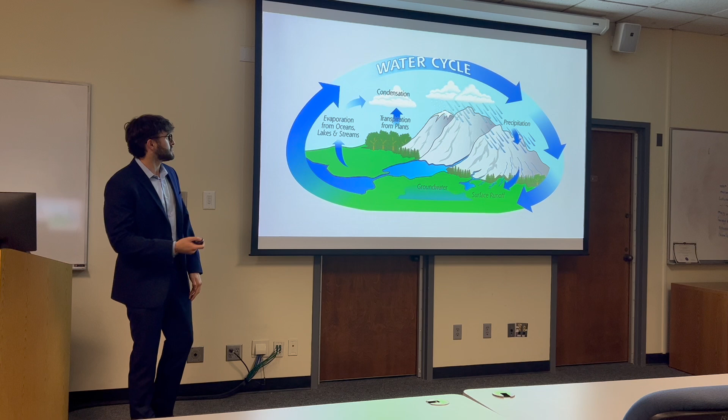This could come across as surface runoff, groundwater, and down the line, it becomes evaporated from oceans, lakes, and streams, or is even transpired from plants, turns into condensation in the clouds, and then repeats the process once again, either by snow, rain, hail, and it loops.

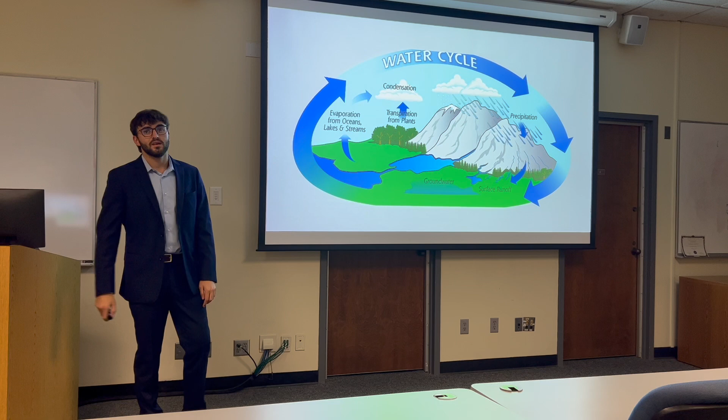What this image does not tell us, though, is what happens when water is artificially polluted and different sediments and chemicals and waste is introduced into this water.

And from this experience, this process, I learned, against my will, what the process is of taking dirty, contaminated water and making it clean. We started by breaking up the layers that began to compile in the first tank, and from this, water could be distributed to the second, where anaerobic bacteria would eat up and remove the sediments and the contamination. And eventually, with time, this water would be reintegrated into the environment and absorbed by the ground and reintroduced to that water cycle that we know so well.

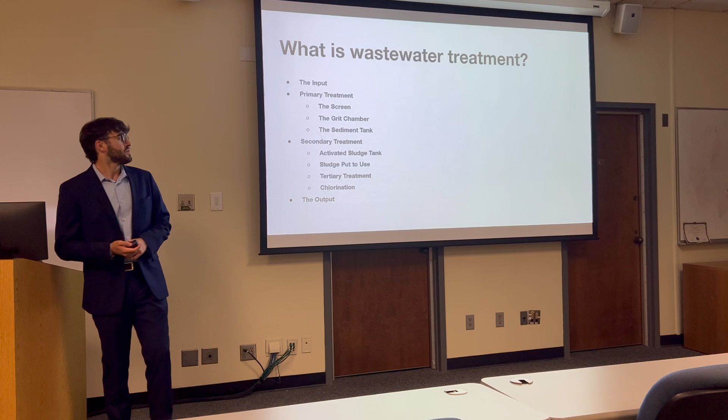First is the input. This can be done through sewage lines that are connected in urban areas, or even personal sewage tanks that are drained and brought to larger treatment facilities. This is a contaminated water that has excrements, urine, pardon my French. You may have toilet paper and just other items that are not suitable for reintegration to the environment, let alone consumption. And they begin the primary treatment phase.

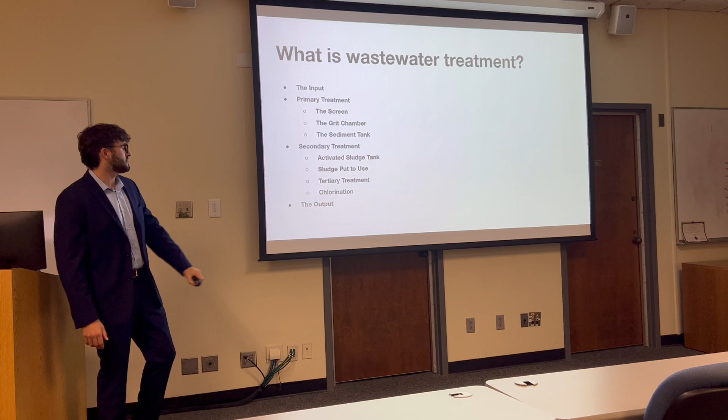This treatment phase includes screening, the grit chamber, the sediment tank. It moves on to the secondary treatment phase, which is a lot more technical and uses a lot of chemicals. And this is the activated sludge tanks, that sludge put to use, tertiary treatment, and then the chlorination phase. And finally is the output.

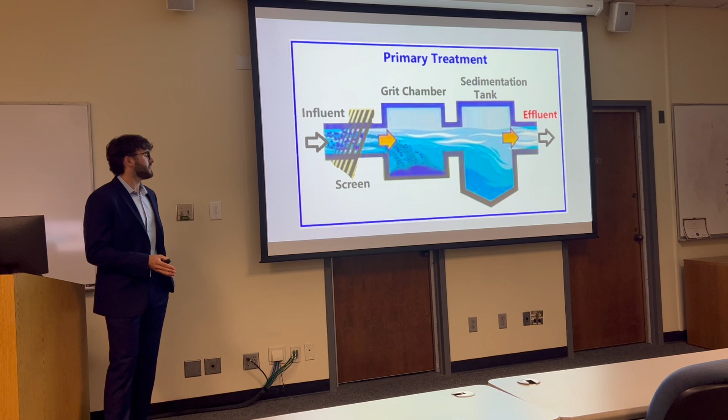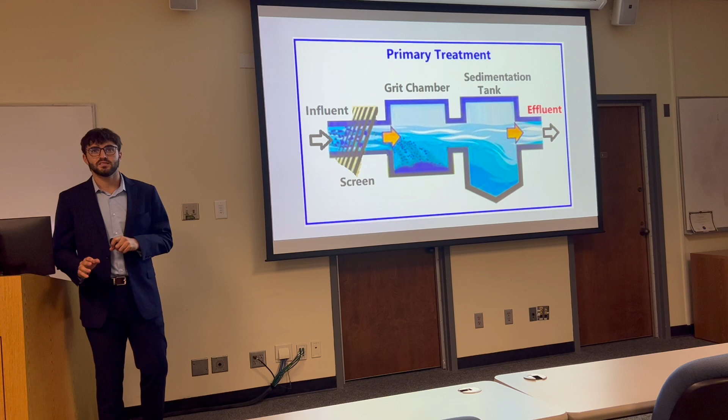This is a helpful diagram, also introduced by Chemtech US, that shows the primary treatment phase of wastewater treatment. First is the influent. This is the input. This is the highly contaminated water that is brought to treatment facilities. It goes through a general screening process, which gets out the big contaminants such as inorganic waste, and also bigger chunks of matter. Then it goes into the grit chamber, and this is where my grandpa comes in. I'll get to that soon.

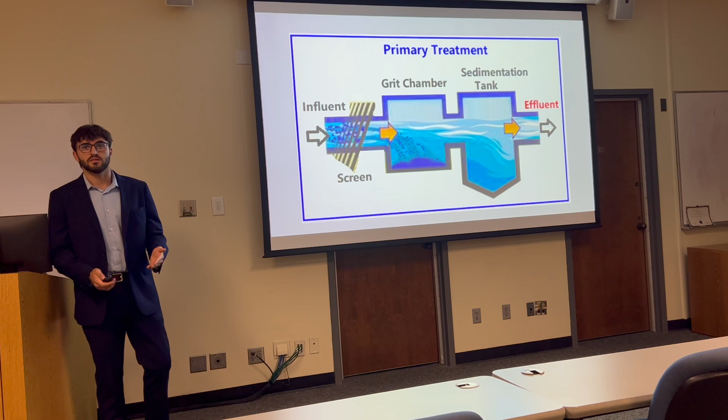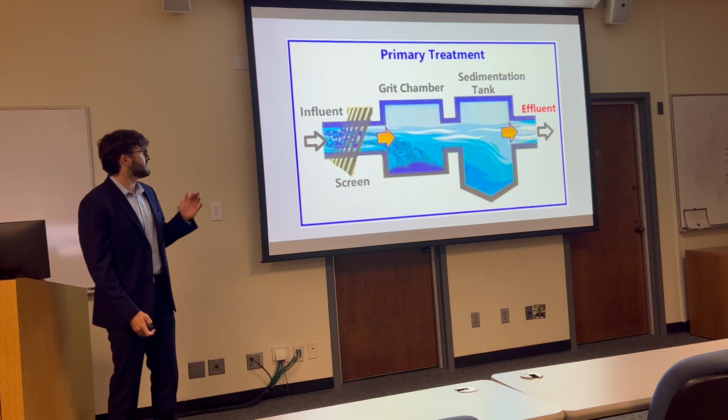But the grit chamber is where the heavier sediment settles at the bottom, and the less contaminated water, maybe it's either smaller particles or just more movable waste, is brought to the sedimentation tank, and then eventually goes to effluent. But this brings us to the secondary treatment phase.

You see the word sludge showing up a lot in this area. And sludge, simply put, is a condensation of waste that is present in contaminated water. Again, not to get into specifics, but I think you all can infer about what this means. This is the most complicated and technical phase.

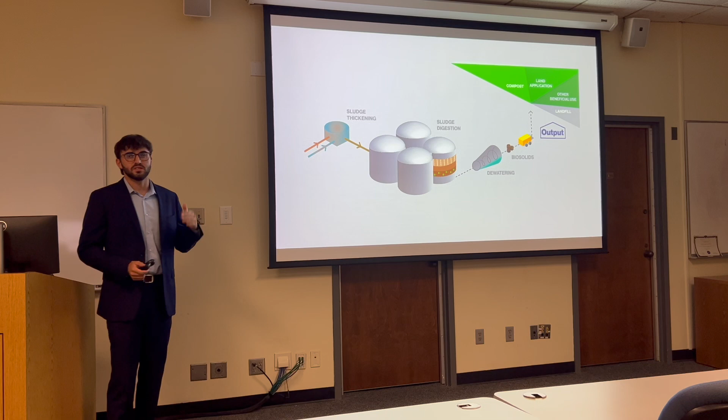This is when oxygen is introduced into the sludge and it activates the bacteria, which is the process in which chemicals are recycled and all the contaminants through different processes are removed. This is far more in depth than the screening or the sedimentation chamber. This is really changing the chemical makeup of the water. It separates out from an atomic level the clean water and the waste.

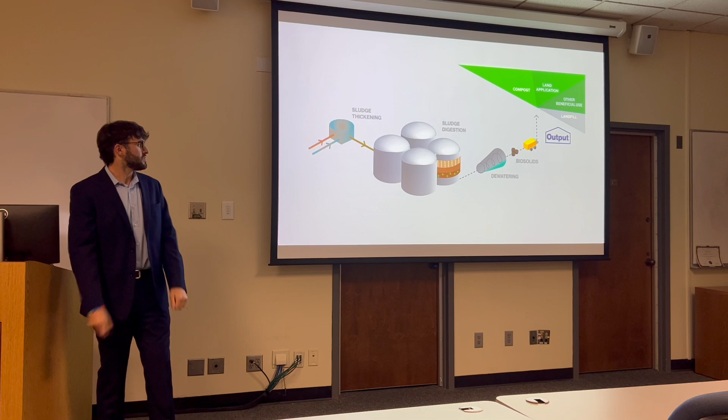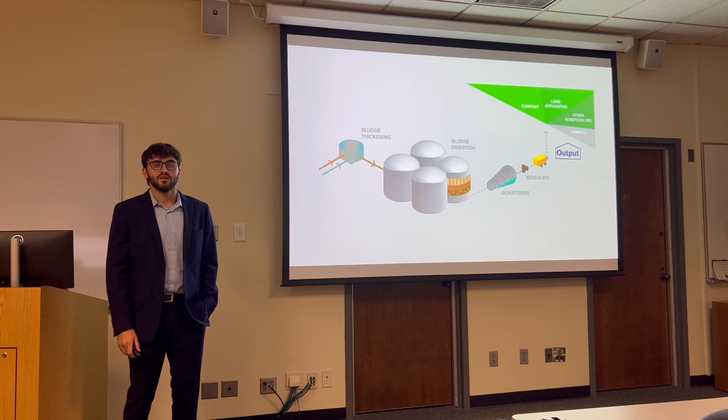This graph here focuses on the biosolid element, but here it shows the dewatering phase, where water is dehydrated from the biosolids, which are then used in compost, land applications, landfills. They're very natural fertilizers and can be extremely useful for renutrifying ground.

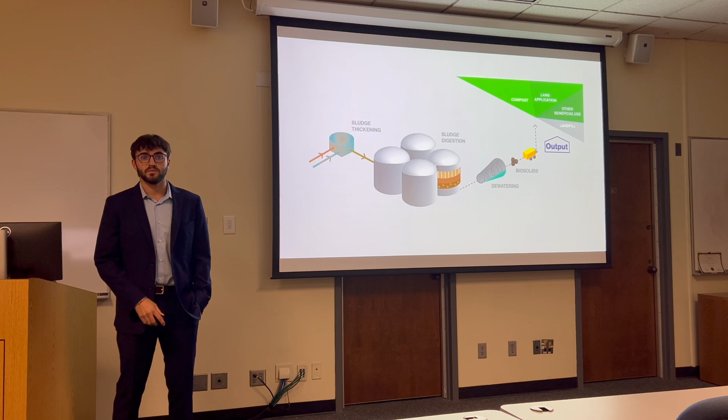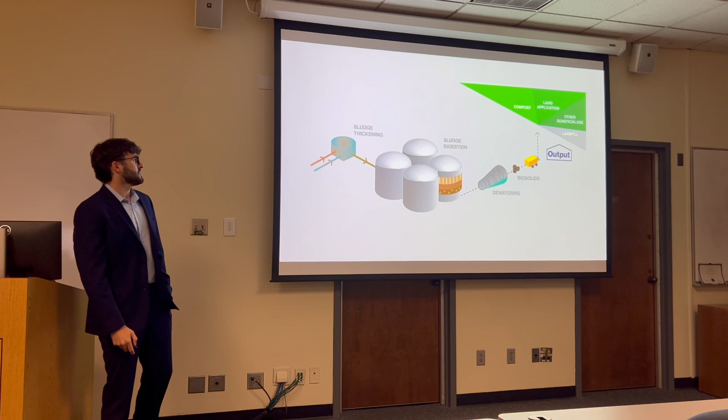And when the biosolids are dewatered, the water then in turn is able to be reintroduced to the environment or used for consumption once again, which sounds gross, but trust me, it is effective and clean as part of the process that these treatments do. And we are able to consume that once again, and it gets reintroduced into the water cycle. That is the final step of the process.

This begs the question, is all water treatment equal? What I showed you here is an idealistic process in which water is taken from a contaminated state, brought through a treatment facility, and reintegrated as clean water. The answer is that no, all water treatment is not equal. Around 20 or so institutions in 2022 got together to evaluate wastewater treatment sites' ability to detect and identify diseases present in the water.

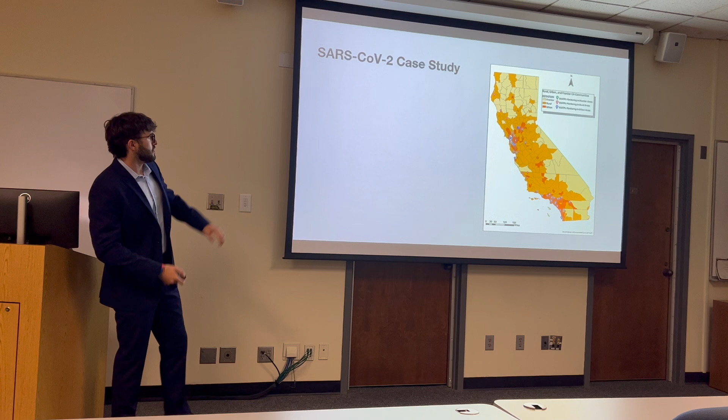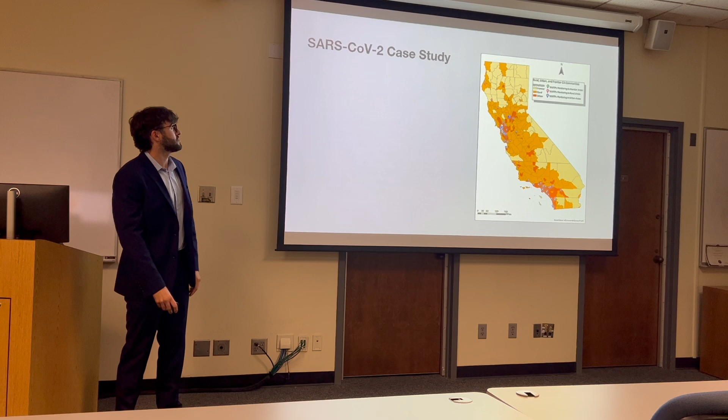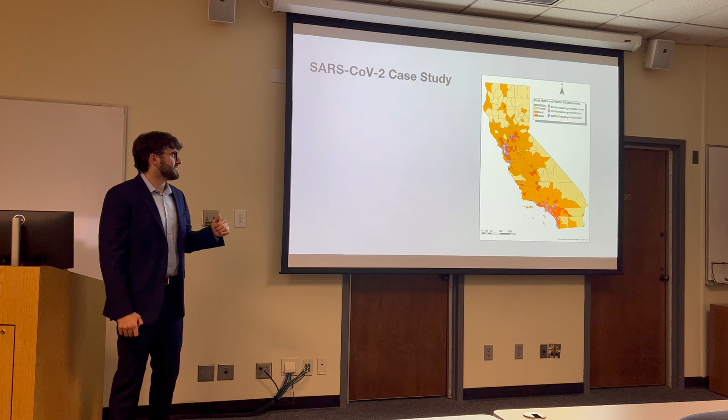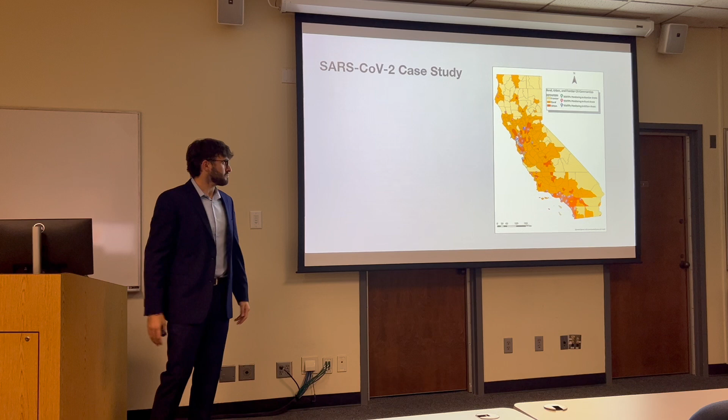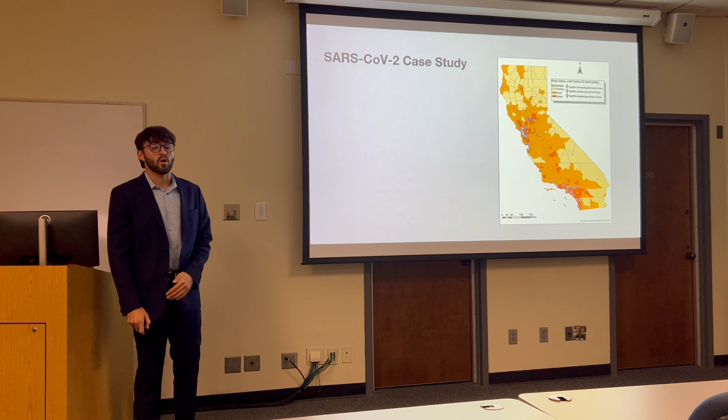What this study found is that 41 of the 48 of these sites are located in urban areas. As you can see, Southern California, like Los Angeles County, Orange County, down to San Diego, and then the Bay Area up here are all the areas in which these sites are centralized. And this means that there's a large majority of the state in the rural, the frontier, the farmland areas whose water isn't able to be detected and the same safety measures are not present.

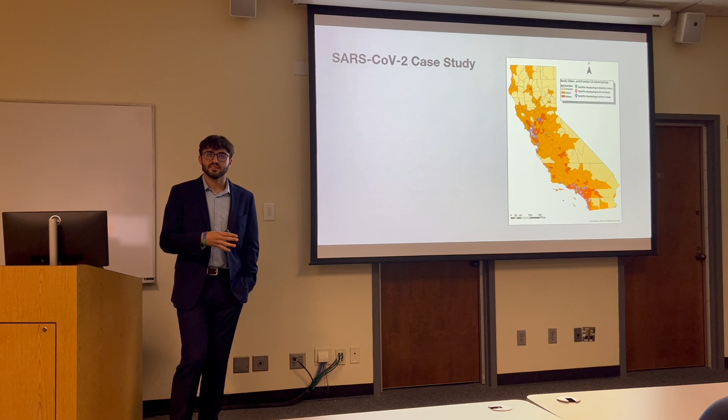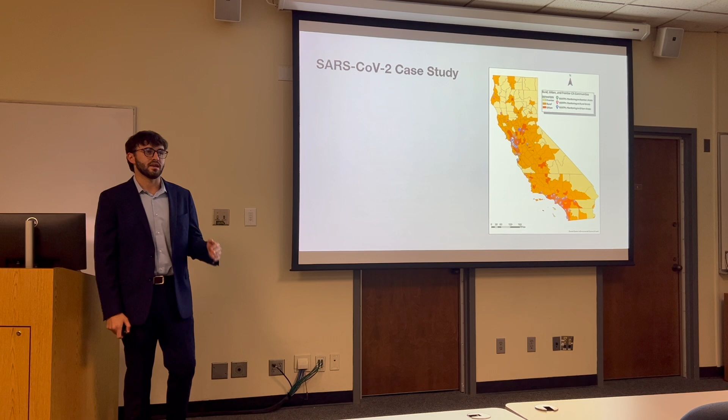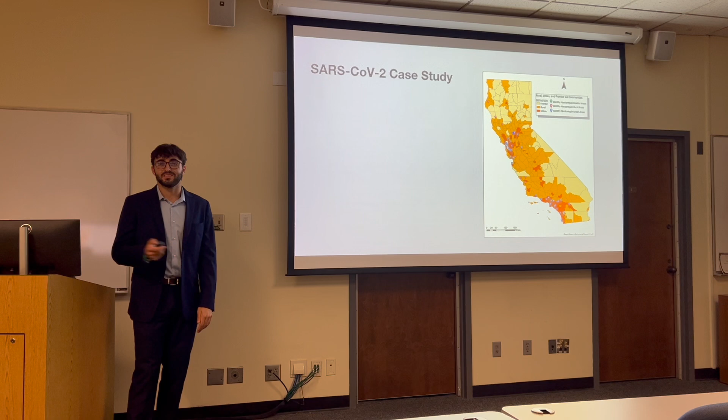California, as we learned in this class, is on the more advanced side of environmental issues, and therefore it is inferable that the disparity is even greater in other states. It makes sense, as urban areas typically have more infrastructure, there's more population, and therefore a greater amount of people to protect. There's more money flowing in. Generally, big infrastructure initiatives are centered in urban areas, but this doesn't change the fact that there's still a significant part of not only the California but the United States population that is suffering from unclean and unsafe drinking water.

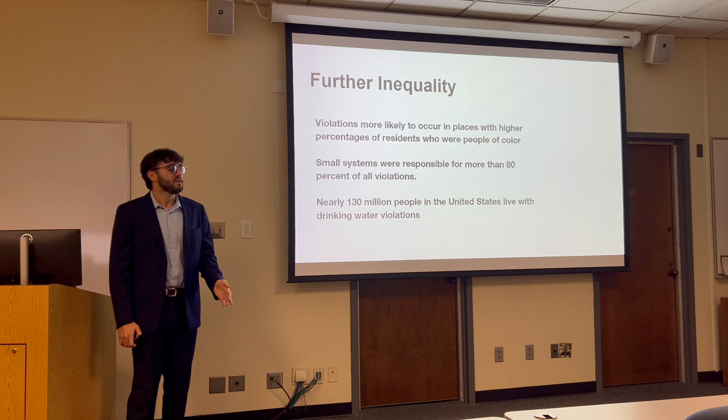There's further inequality present, as an EPA study from 2016 to 2019 found that legal violations of water safety measures are 40% more likely to occur in communities where there's a higher percentage of people of color, which introduces a racial inequality that is seen among many policies in the United States as well. Small systems, as opposed to more urban systems, were responsible for 80% of all violations, which again affirms the study that was done in California. It adds further depth to the issue that people living in rural areas are not receiving the same quality of water that people in urban areas are.

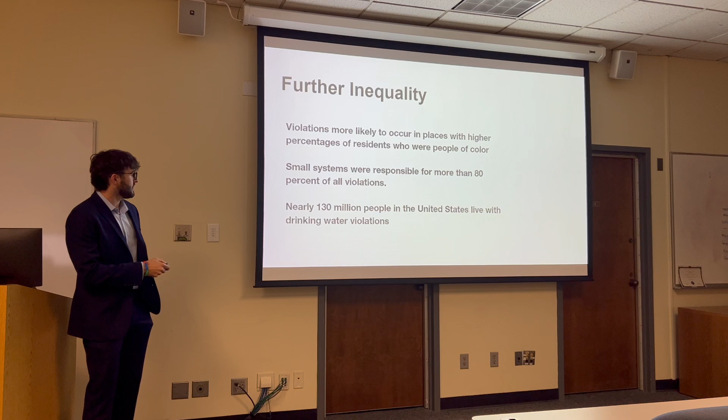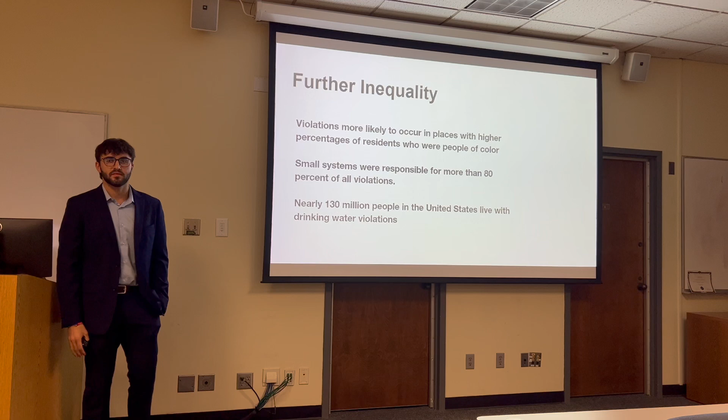And nearly 130 million people in the United States live with drinking water violations. This doesn't necessarily mean that the water will induce disease or create widespread seen effects, but with time, unclean water does compile and can create bodily issues and suboptimal functions throughout life.

The conclusion is that water is a fundamental need. It is necessary for survival and therefore should be a top focus as far as infrastructure policy goes. We see that cleanliness is complicated. The ideal process that I laid out includes 8 or so specific components, which requires lots of money to come in, lots of chemical expertise, engineers, and this process is only completed with the necessary funding and support, and has no correlation to the complications that rural areas and lack of funding, lack of support can bring to this.

And the hope is that we can advocate for further equality. The NAACP posted a brief in reference to the study by the EPA in which it proved that communities of people of color are disadvantaged as far as water quality. And they had a very, very clear call that we all should take as well, especially in this class, as people passionate about environmental issues, that we can advocate to legislators, advocate to policymakers, lobby, and even more applicably, just have conversations at the grassroots level, just to illuminate people that not all water quality is the same,